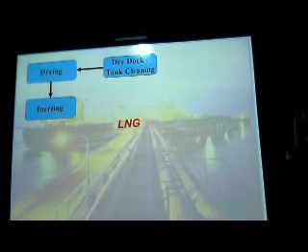And then we introduce some cargo gas, in order to purge the tank, cool it down. So as the liquid comes in and it's flashing off, it's drawing heat from the tank, cooling it down.

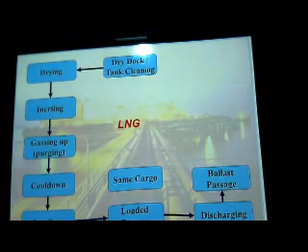And so we cool the tank down, we load it, we go on loaded passage, we get to the discharge port, discharge the cargo, and then we go on a ballast passage back maybe to the same place to get more cargo. If it's the same cargo, it's dead easy. We just go back and we reload again. So that's the cycle of the cargo.

Okay, now if we want to take the vessel out of service again, we go back to the same condition where we go, should be another arrow here, we go liquid free, we inert, we now aerate it, we add fresh air, and to get it back to ambient conditions, we go back in for tank cleaning.

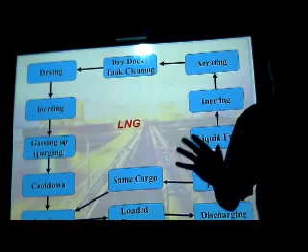Now on an oil tanker, for example, tank cleaning is essential because the tanks do get very dirty because of the nature of the crude oil that's being carried in it. But as you'll see from the inside of these gas carriers, the tanks are spotlessly clean. There should be no dirt, no residue, nothing left behind. So the tanks are very, very clean.

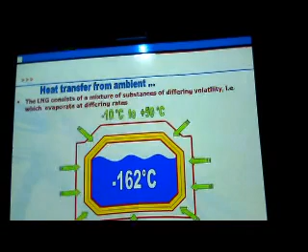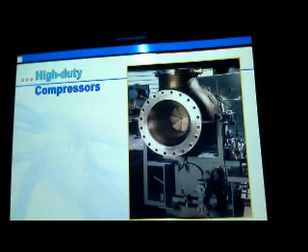So cargo handling equipment is installed in the deck house on the vessel itself. These are the compressors for handling gas. We've got high duty compressors. This typical here, 15,000 to 35,000 cubic meters per hour.

And during tank filling, if we're taking liquid into the tank, then the ullage space, or the space above the liquid, we need to return the gas to the shore for reprocessing, for re-liquefying, because they have the facilities on shore to do that. So we use these compressors to return the vapour.

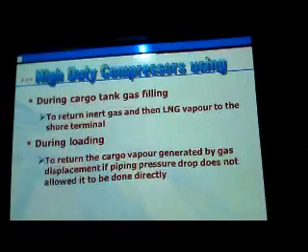During loading, we return the cargo vapour generated by the gas displacement. So if the vapour can return back to shoreside naturally, fine. If not, we would have pumped it back.

And we also use the compressors during warming up. So we have low duty compressors, smaller capacity, and the task here is to control the boiler pressure. Sorry, I jumped on too far ahead there.

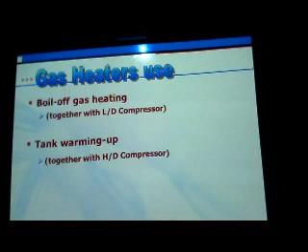Gas heaters, the boil off and warm up heaters. And we use boil off gas heating together with the LD compressor, and we use the tank warming up together with the HD compressor. We also use a vaporizer, which is used to force cargo, and we'll come to that in a second.

Again. Jump too far ahead there, sorry.

When we're using boil-off gas, the boil-off gas is a natural process caused by the input of ambient temperature into the gas that causes the boil-off. So we use boil-off back into the boiler, or as you've seen on the video earlier, into the diesel generator that can use gas. So there's two things we can do.

We can use minimum gas, so we only use the boil-off. So how do we make up the rest of the propulsion fuel if we're using minimum boil-off? We have to use diesel oil, yeah? So depending on the charterer, depending who owns the cargo, depending how much is being delivered at the other end, and depending on the cost, will depend on how much gas we burn compared to how much diesel we burn.

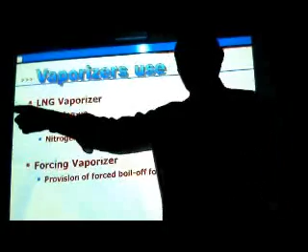Okay. Now we saw that 0.1 to 0.15% can boil off in a day. So if we've got a long distance to go between ports, let's say we're going from the Arabian Gulf to Japan, we want to get there as fast as possible so that we don't boil off a lot of cargo.

If we want to deliver the maximum cargo to the customer, it depends on the price we're going to get for our cargo. If, however, the LNG price is cheap compared to bunkers, we might either slow down so we don't get there so quickly, so we're going to burn some more boil-off, or what we can do is go for maximum gas.

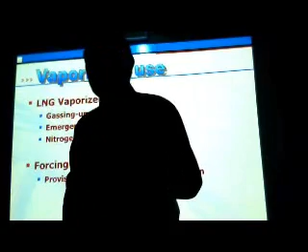And what we actually do then is we use a vaporizer and we force the tank, so we force boil-off. We make extra boil-off gas, so we burn more gas in the engine or in the boiler than we do fuel. So that's what we call forcing. We use a vaporizer to force that. So we're actually encouraging, we're forcing boil-off to happen to give us more gas as fuel. And so you're quite happy with that, yeah?

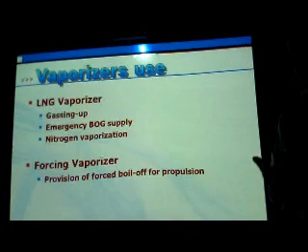So whether it's minimum or whether it's forcing, that's very much to do with the charter, it's to do with the cost of bunkers compared to the cost of cargo. When I say bunkers, I'm talking about fuel oil bunkers, whether it's diesel or residual. It's going to be costly. So if we're in boil-off gas mode, that's conventional boil-off gas mode.

We've got our LD compressor, our boil-off heater, boiler in the engine room, forcing vaporizer, mist separator. And so what's happening here now is boil-off is going up through this mist separator. We don't want liquid going here, so we just have gas only coming up here to the compressor.

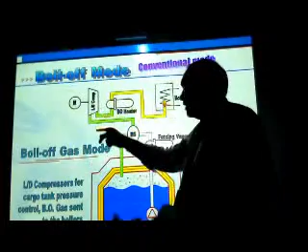Bearing in mind this gas is cold, -162, this is chilled gas going up here, it goes into the boil-off heater. The boil-off heater heats the gas up to about 20 degrees centigrade or so, before the gas gets piped back to the boiler.

Now, the pipe work going back to the boiler is double skinned. So we've got the gas pipe in the middle, we've got another pipe on the outside. In this annular space, we have gas leakage probes and alarms. So if our gas pipe springs a leak, it's not going to leak to the atmosphere, it will leak between the two pipes. So it's for safety, it's double skinned pipe, and it's piped back to the boiler. And then that gas is always ignited and it's burned in the boiler.

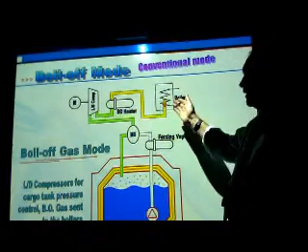So if this gas can't supply enough, then the boiler is arranged with gas burners and a fuel burner in the middle. So we can just put more fuel in. So the boilers are very automated. We can set our steam pressure, we can set our steam temperature, we can set our ship speed.

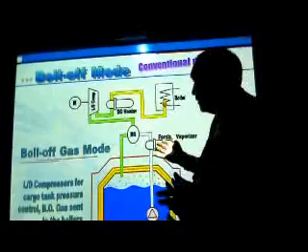So the plant will modulate. Whatever speed we get from the propeller has to be provided from the engines or from the boilers, and then we can allow it to be controlled by supplying extra fuel to make up for what we're lacking in gas. Okay, what about the mist? Goes back to the tank? Yeah.

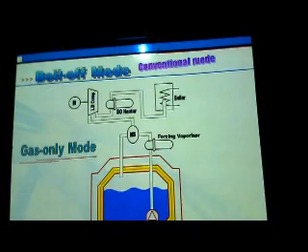So the balance required to drive is by bunker oil. So the propulsion now, if we require more, as we do in this case, comes from the bunker oil. Gas only mode. If we use boil-off only, natural boil-off isn't enough to drive the ship. There's just not enough gas there to give you the power. So we then use additional gas that is provided by forcing.

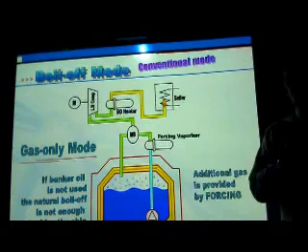So we take liquid from the tank, we heat it up so that it expands into gas, and that's what we call forcing vaporizers. So forcing more vapor. We're taking two streams here. We're taking gas from the top of the tank, which is maintaining the pressure at the correct level, and then we're taking liquid from the bottom of the tank and we put it to a heater, which causes it to flash from liquid into gas, and we put extra gas into the boiler. So additional gas provided by forcing. That's what we call forcing the cargo.

So this would be burning just pure gas now. Gas only mode. So in terms of emissions, our emissions are going to be very good because there will be no sulfur products, unlike you'd get in the fuel oil. But at the same time, we're using up cargo. But if the cargo is cheaper than the bunkers, then it's cost effective. It just means we've got less cargo when we get there.

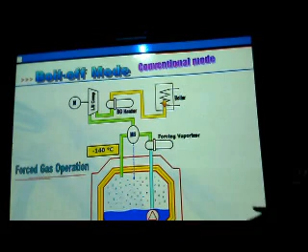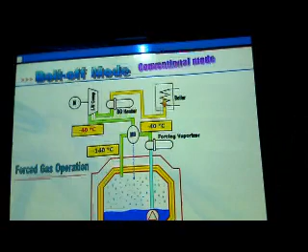Yeah, there's the mist separator, drain back into the tank again. Temperature wise, leaving the tank around about minus 140 degrees centigrade. Coming out the forcing vaporizer at minus 40. Going into the LD compressor. Remember, this is a much bigger quantity than we've got coming in here. Through the LD compressor, into the boil-off heater, and then into the boiler again.

Okay, any questions on that bit? You're quite happy with the trade-off between fuel and gas.

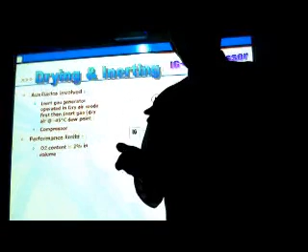Okay, before trial or after dry dock, we talked about this method earlier. We bring in nitrogen, an IG generator. Now, on a conventional steamship, what we use for IG is the exhaust from the boiler. The exhaust gas from the boiler contains very low oxygen. We keep the oxygen less than 5%, normally about 2% is the oxygen content of the gas leaving a boiler to stack.

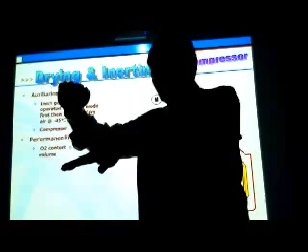However, in the uptake of the boiler, we draw off the exhaust. The exhaust will contain nitrogen, it might contain some sulfur products, and some water vapor, H2O. But we put that gas through a scrubber, what we call a scrubbing tower, and it washes the gas. So what's coming out is effectively clean gas, nitrogen. But we don't want to do that with this plant, because in an oil tanker we're putting that into the ullage space above the cargo, between the cargo and the deck, and it's at ambient temperature, so it's fine. So if there's any moisture in that inert gas from the boiler, it doesn't really create much of a problem. However, if there's any moisture coming into here, it's going to cause problems by freezing.

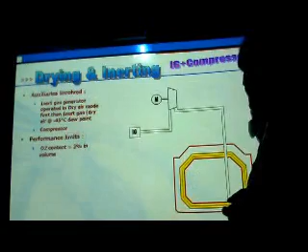So what we do is, instead of having uptake gas, which is cooled and scrubbed, we will have an inert gas generator providing us with nitrogen in effect to allow us to inert the tank. Obviously, if the tank is full of air to start with, we need to get rid of that air and we need to get the tank so that there's no volatile atmosphere in there that contains air and gas.

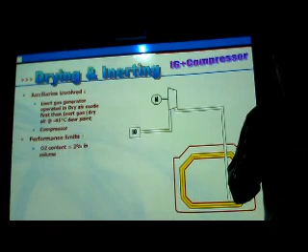Because otherwise, you see the size of these tanks. It's like an oil tanker. An oil tanker is actually more dangerous when the tank's empty. When the tank's full, it's got very little space at the top, and it's normally over-rich with vapour, so it's too rich to actually ignite. But when the tank's empty, if it's got vapour in it and a small amount of air gets in, it can quite easily form a flammable mixture, and if that ignites, you can get a massive explosion. So this is really why we're inerting, and we always inert before we introduce cargo into the tank.

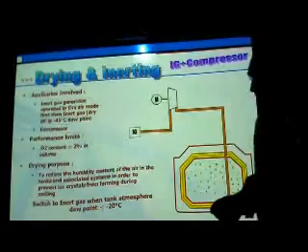So that's my tank filled now with inert gas, and you'll have a purge line coming out, so that if the inert gas goes in, air gets purged out. We've got instruments to measure the atmosphere in the tank. So the purpose is to reduce the humidity of the air in the tanks, prevent crystals forming. So switching to inert gas to tank atmosphere dew point minus 20.

Okay, it could take up to 40 hours to dry and inert the tank fully. Seems like an awful long time.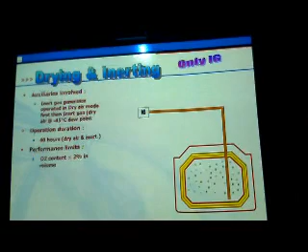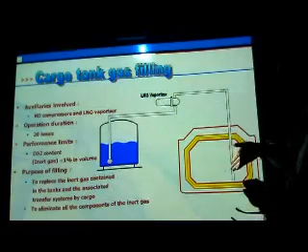Cargo tank gas filling. We want to introduce gas into the tank now. So the purpose of this is to replace the inert gas and eliminate all the components in the inert gas. So we now bring gas into the inert atmosphere. So we've taken the air away, any O2 that's in the tank, replaced it with inert gas. Now we're going to drive out the inert gas and replace it with actual cargo gas. So we go through the vaporizer and the gas enters the tank. Because it's at a much colder temperature, it starts to cool the tank down.

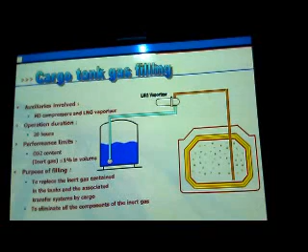So we need to be connected up to the onshore facilities for doing this. And the purpose of this is to reduce the temperature in order to avoid excessive vaporization during loading, and to limit the thermal stresses occurring in the components of the vessel itself, the tank. So everything's got to be done very gradually, very slowly, so we don't have thermal stresses occurring in the tank.

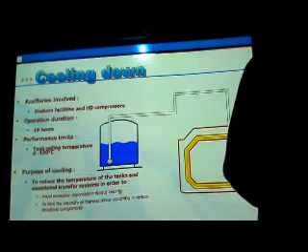Do they use pumps to pump the cargo or only pressure? No, they use compressors. Rotary type of compressors. So because it's vapor, it's just rotary compressors that pump the gas back to a facility. But that's concerning the vapor that comes out of the gas, right? Okay. Yeah.

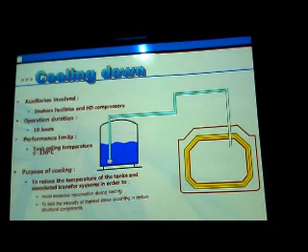So this is cooling down now. So we're putting liquid gas into the tank, and as the liquid's going in the tank, what's it doing? It's expanding, it's flashing off. Its temperature wants to be low, so it's taking in heat from the surroundings, and the tank is starting to chill down. You know, like if you use a CO2 extinguisher, it gets frost when it expands from the high pressure liquid to the vapor. The same thing is happening here. This is cooling down, starting to cool the tank down.

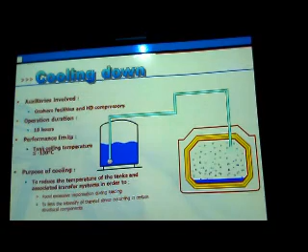So this can take up to about 10 hours to achieve the cool down, and the tank temperature can be down to -30. So all this is carefully monitored. We need to monitor the pressure in the tank as well as the temperature in the tank. So if we do this too quickly, you can overpressurize the tank. So it's done slowly.

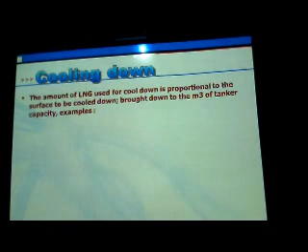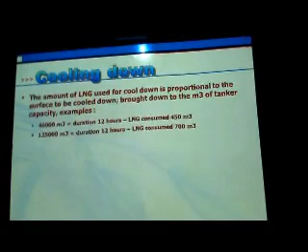Okay, the amount of LNG used to cool down is proportional to the cubic meter of tank capacity. So you get 40,000 cubic meters, takes 12 hours, and it's going to consume 450 cubic meters of LNG. When we say consumed, it's not really consumed, is it? It's returned back to the shore, yeah. It's not like burnt in the boiler or anything, we're not really consuming it as such. 125,000 cubic meters, again it just uses more gas.

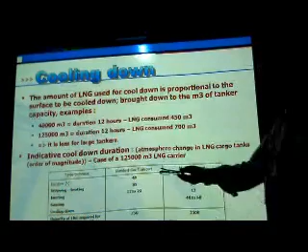So, atmosphere change. These are different types of tank, Moss Rosenberg and Gaz Transport. The Moss Rosenberg is the spherical tanks, and these are the sort of honeycomb shaped tanks.

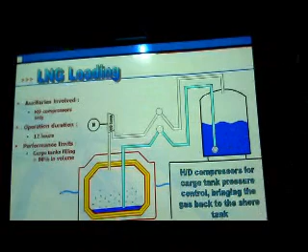So now we move on to loading itself. We want to start loading cargo into the tank. Now that we've cooled the tank temperature down, it's ready to accept the cargo. We start filling it up, and we've got vapor in this space here. Again, pressure in the tank has to be carefully controlled. So we use the high duty compressor, pump the vapor back to the shore facility. So as this is coming in and this is going out, we have to make sure the pressure balance is there so that we don't overpressurize the tank.

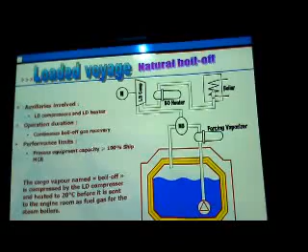Now we're loaded. Got cargo in the tanks, and if we go back to the state we talked about earlier, it was natural boil off. So again, we're just allowing for natural boil off. This yellow here signifies the insulation around the tank. The tanks are very heavily insulated. Even so, heat will still get through and boil off over time. So we're looking at continuous recovery of the boil off. Again, as we said earlier, that's going back to the boiler and burning the gas.

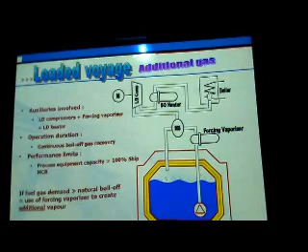Additional gas, what we're going to do, we're going to force it. So we put the forcing vaporizer on, and this is when the fuel gas demand is greater than the actual boil off. We need the use of the forcing vaporizer to create additional vapor.

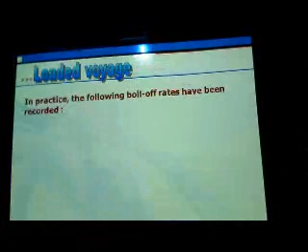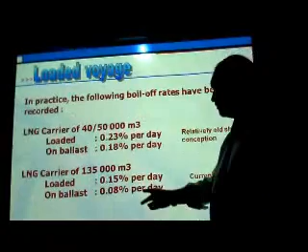So, in practice, the following boil off rates have been recorded. 40 to 50,000 cubic metre LNG carrier, loaded 0.23% per day. That's relatively old ships, and in ballast about 0.18% per day. Bigger vessels, 135,000 cubic metres, 0.15% in current ships, and it's envisaged that that rate would drop down to 0.08% per day in ballast.

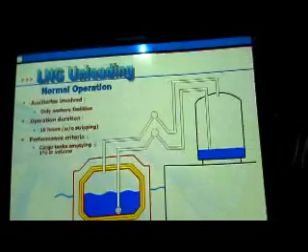Unloading. Now we've got our cargo to Japan or wherever we are. We're going to discharge it. So we're putting it to the onshore facility. It's going to take a 10 hour operation, and then we're going to empty our tanks to the shore side. So again, maintaining the pressure in the tank, we do the opposite this time. So we take gas from the shore back into the tank to make up for the liquid we're taking out.

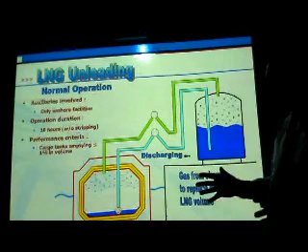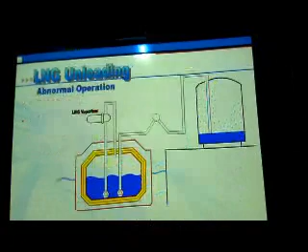The last thing we need, as well as causing overpressure, we don't want a vacuum in the tank. A vacuum will collapse the tank, cause major structural problems, because it's a big tank, it's large volume, so even a small amount of vacuum in there would cause the tank sides to come in, to start to crumple and implode. So that could damage it severely. So we need the gas to replace the liquid that's been removed and discharged to shore. Unloading.

Abnormal operation. We're discharging cargo to shore facility, and we use a vaporizer complementing LNG vapor from shore, or no shore connection for gas replacement available.

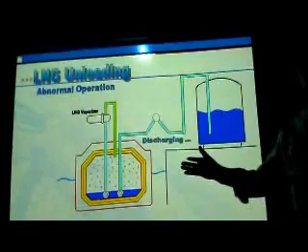As I said earlier, vacuum, we don't want any vacuum forming in the tank. So we could create our own pressure. If we were only sending the liquid ashore and we didn't have a facility for coming back from shore, we could have our own onboard vaporizer, which is still taking some liquid from the tank and heating it up and putting it back in again as vapor,

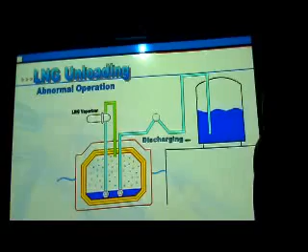which is just maintaining tank pressure. But it says there that that's an abnormal operation, so that's not something we would be doing if we could help it. Can we supply the tank with enough gas in order to maintain the pressure instead of using the... No. It needs to maintain the gas atmosphere until the cargo operation's finished, without mixing of anything else. Yeah, it needs to be 100% methane LNG in the tank.

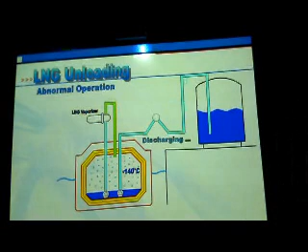Temperature as possible. How do you assure temperature control? Well, we need to regulate the rate of the vaporization. So that's us discharged the cargo. We've now got more or less empty tanks, but we still have some. We've got ballast, but we need to have a volume of cargo retained on board to keep the tanks cold for the next loading.

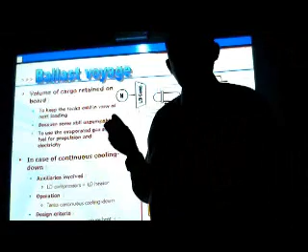What do we mean by unpumpable? When the tank is very cold, the last part the pump cannot touch. Yeah. So we can use the evaporated gas as fuel. So we carry, as I said earlier, it's sometimes called heel, the amount of cargo that's kept on board. We need to keep the cargo on board.

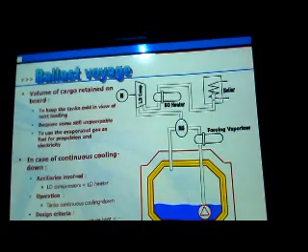If the next voyage isn't too far away, we're going to get to another loading port. Tanks are still to be kept chilled so that we can accept another cargo, providing it's the same cargo, the same gas. What about the gas vapor? It's still inside the tank also? Yes, you still got vapor in the tank here. So now, once again, we're taking vapor back, and we're going to just control the pressure in the tank. Back to the boiler.

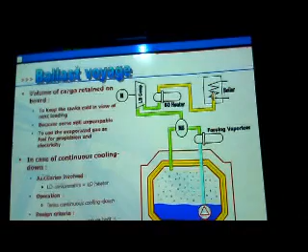Keep the temperature of the tank correct for getting it back to the loading port. If we discharge the cargo and we don't need to load another cargo, suppose we were to go to repair yard or suppose we were to go to dry dock, then we need to get the tanks ready for that. So we warm the tank up.

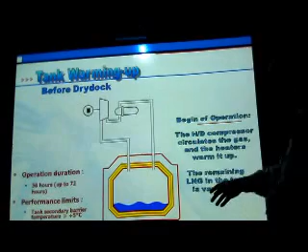So we use the compressor to circulate the gas and the heaters to warm the gas up. Yeah. So the compressor circulates the gas, heaters warm it up, and the remaining LNG in the tank is vaporized. So taking it from -140 to 0 degrees centigrade, so that's it starting to warm up.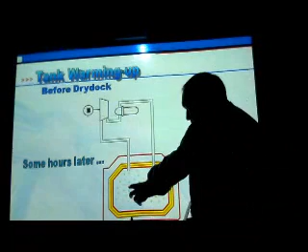Some hours later, we've got no liquid left. Warming up is finished when the tank reaches consistently throughout the tank 0 degrees centigrade. So again, this is averaging the temperatures here. We're taking it to 0 here, it's 30 coming out here, we heat it up, and we're warming the tank up now.

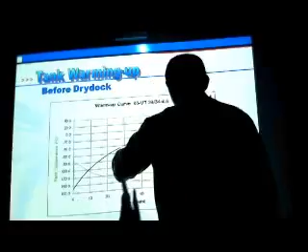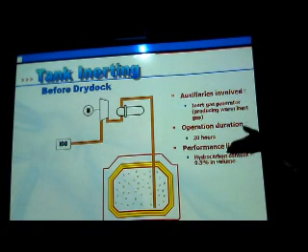So we've got the curves there: warming up, flow rate and time, heat exchange, temperature. It's all done, as you can see, very slowly over a large number of hours. And then we're going to fill the tank with inert gas. Again, inert gas generator. And it's operating in the dry air mode.

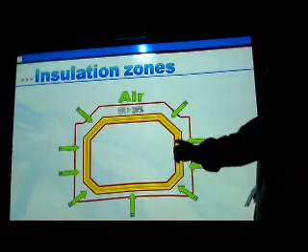Purpose is to allow access of personnel inside the tank to make inspection or perform work. It's not often you get a chance to go into these tanks, because normally the ship is in its working cycle, either loaded or on ballast passage. Around the tank, we've got insulation and we have air. We introduced air, oxygen content, O2, 21% is the normal O2 content by volume in air. So we allow air into the space around the tank, which was kept inerted.

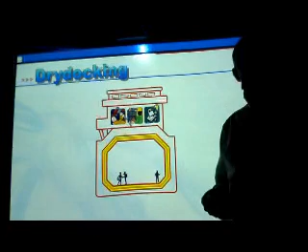And then we go into dry dock. What's going to happen in dry dock? Maintenance, repairs. Dry docks are one of the biggest causes of fires and explosions that happen on board ships. Because if you get a ship, especially like oil tankers, where you have compartments that are supposedly gas-free, and they've even been certified gas-free, and then someone adjacent starts welding, then all of a sudden a spark or something, and an explosion can happen.

So we need to make sure that tanks are absolutely free of any cargo. We test for hydrocarbons, and we test the atmosphere to make sure it's 21% oxygen.

During dry docking, we have a lot of people on board and a lot going on. Sometimes the contractors aren't familiar with the ship or its systems, so the ship staff have to keep an eye out to make sure there's no dangerous situations arising, particularly if someone's welding. If I'm welding on this bulkhead, what's on the other side? It could be another tank. A contractor might not realize it's a fuel tank and think it's just a room next door, then start welding on it. So the ship staff, knowing these things, should keep an eye out to make sure there's no dangerous practices.

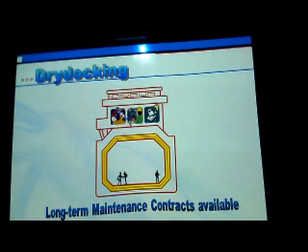After dry dock, we follow a similar procedure. We take the ship back into service, and if we had any major works, we might do some trials and go back to sea, then return to service.

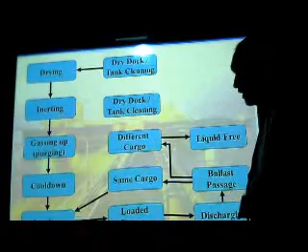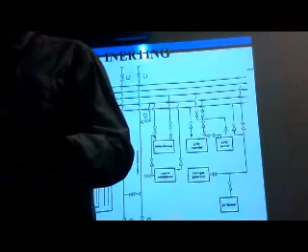Earlier we looked at the cycle where we load, pass same cargo, and load again. If we have a different cargo, we have to make sure we're liquid free, gas up and purge again — then it starts to get a bit complicated. But before we get into dock, what we've always got to do is air the tank, get it back to atmospheric conditions, for all cargo tanks. There are some other diagrams showing more detailed systems which I don't think we'll cover for the moment, but that was our basic operations carried out on an LNG tanker — cycled operations, LNG cycled operations.

So for you, I think that was your first taste of LNG operations, wasn't it? Any questions? Thank you. No, just... you know, it's actually quite...

LNG operations have been going on for over 50 years, believe it or not, starting on a smaller scale and moving up to these bigger vessels. There haven't been any great disasters concerning LNG. The obvious problem with LNG is what we call loss of containment — keeping the liquefied gas in the tank. If it escapes, it increases 600 times in volume, so 1 cubic metre of liquefied gas becomes 600 cubic metres of gas. That's a lot of gas, and if it ignites, it will cause major explosions. The Japanese have been very conscious of this, being an importer of gas. Many LNG carriers over the years have traveled to various ports in Japan to discharge cargo, and they've been very careful on safety procedures, and touch wood, there's been no big LNG disasters.

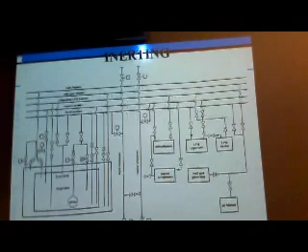In ports nowadays, security is a big issue, particularly from the point of view of anyone trying to carry out an act of terrorism or damage to a vessel. If you wanted to pick a big target, you'd choose an oil tanker or a gas carrier. So not only do we have to look after the safety aspects and operational safety, we also have to make sure, security-wise, that no one unauthorized gets onto the terminal or vessel who could interrupt cargo or cause damage leading to loss of containment or an explosion. That's the world we live in.

Any other questions?

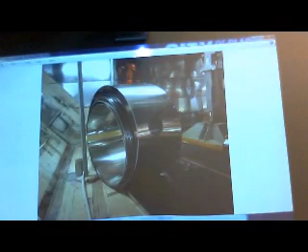Some pictures of the insides of the tanks, the LNG cargo tanks, and that's a compressor. These vanes are variable, so that alters the flow rate of the gas passing through it. They're constructing the tank made of special stainless steel, with the coatings, building the tank sections, and putting in insulation. See, it's wooden — wood's a good insulator, so this will be filled with other insulating materials as well.